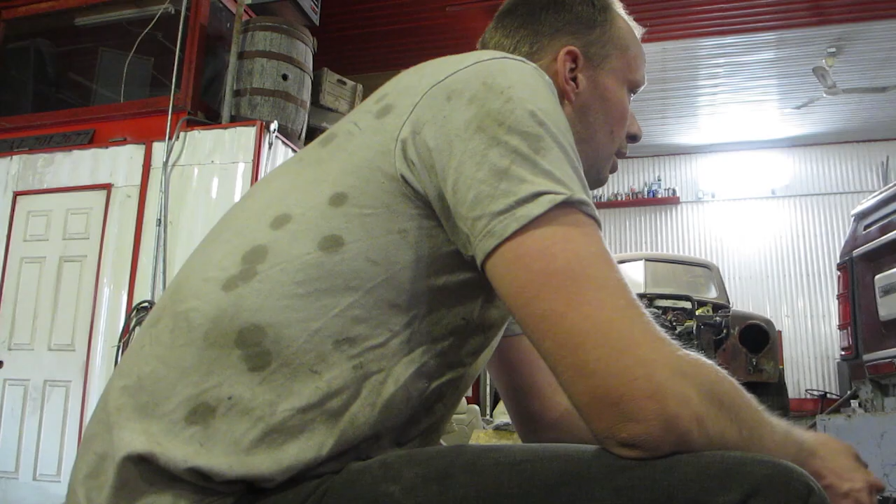Look, when we started this thing, you knew we weren't going to be exclusive. I mean, it's not me, it's clearly you. I'm trying, I'm doing my part. I did everything I possibly can, but you're so needy. I fixed your front half, I fixed your back half, I fixed your top half, I fixed your bottom half. What else do you want me to do? Get out of my shop!

Okay, so we're almost done. Except now we gotta do the wiring for the trailer and the truck itself.

So yellow is going to be left. There's an L in yellow, so left is an easy way to remember that. That goes to your left tail light. Green has an R in it, and it goes towards the right, so we're gonna go this way. That's gonna be right tail for turn and brake.

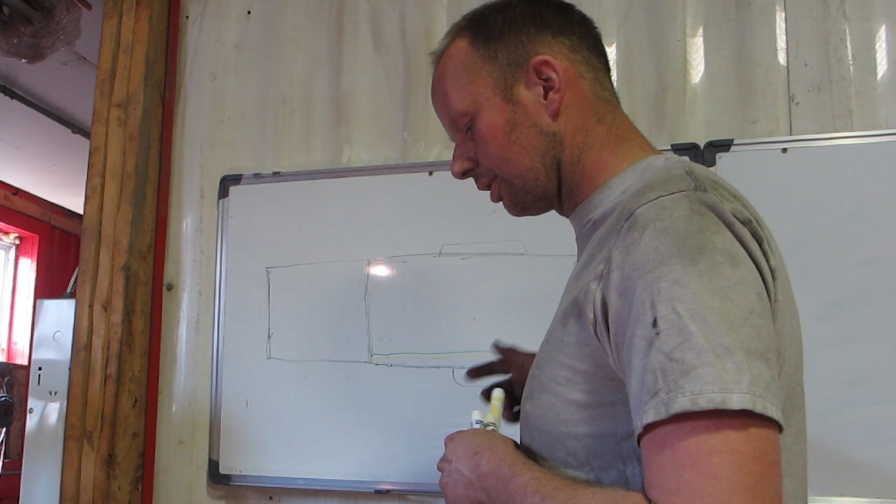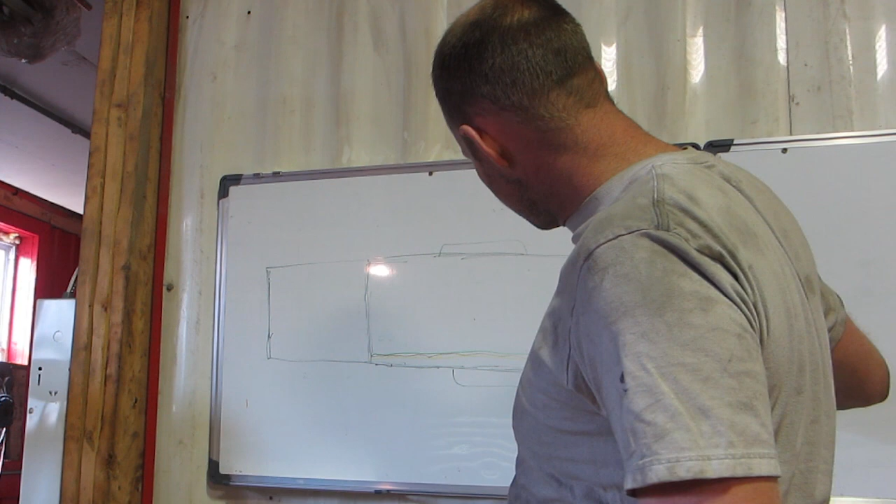Brown is your tail. Brown is down around your ass area, and that's also where other brown stuff is. So brown is your tail, and we tee that off here. Then white is ground — we're in Canada, snow, white, snow on the ground, white, ground. That's how I remember. Blue is brake, so they both have a B in it. So that goes to the trailer hitch.

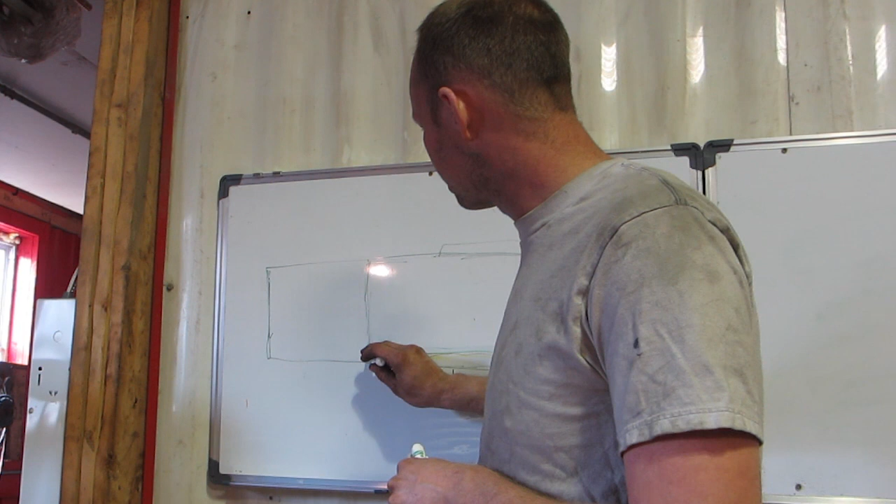So the problem is the truck also has cab lights. So we've got a brown going off to the cab lights. No big deal. We also have brown going to your headlight, and from there over to your other headlight.

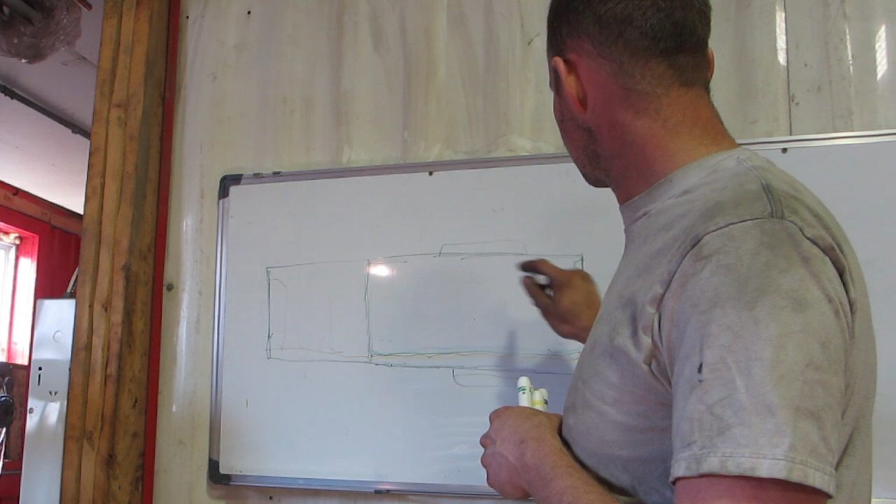Now this truck also has lights on the fenders, so generally rather than cutting the loom in the middle, we try to tee off in the back here somewhere and feed fender lights. Now it also has fender lights on the other side, so we make another tee and feed fender lights here.

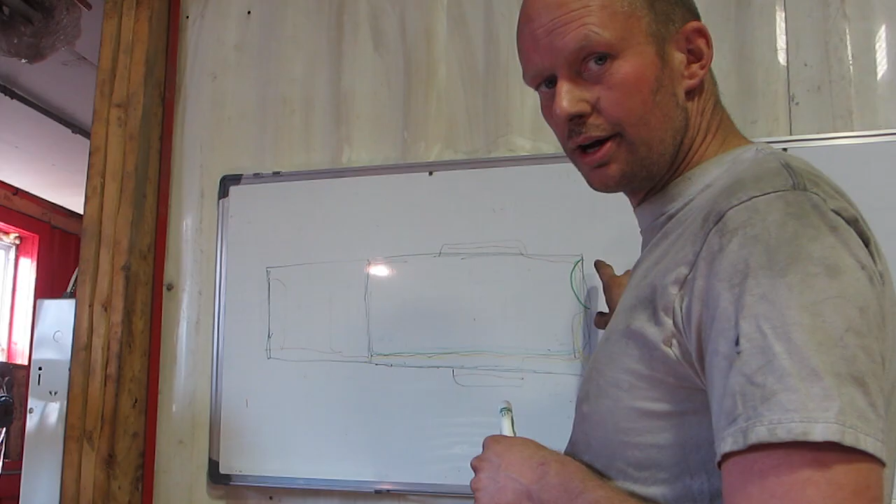Now we also have a trailer plug here. The yellow will have to tee and go here, and the green will have to tee and bring that over to there. We're going to need another brown for a taillight somewhere, so we'll probably tee that off into here too. Now there's also lights on the tailgate, so we probably need another tee right from here, and that's going to feed the taillights here.

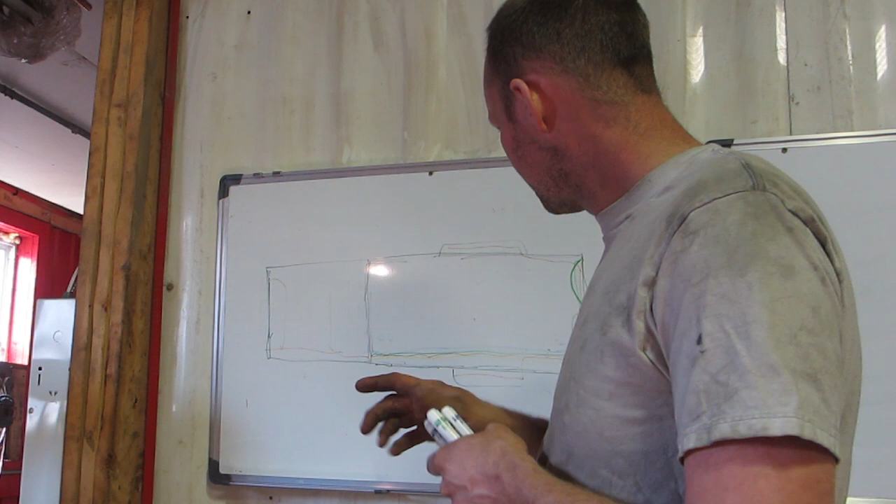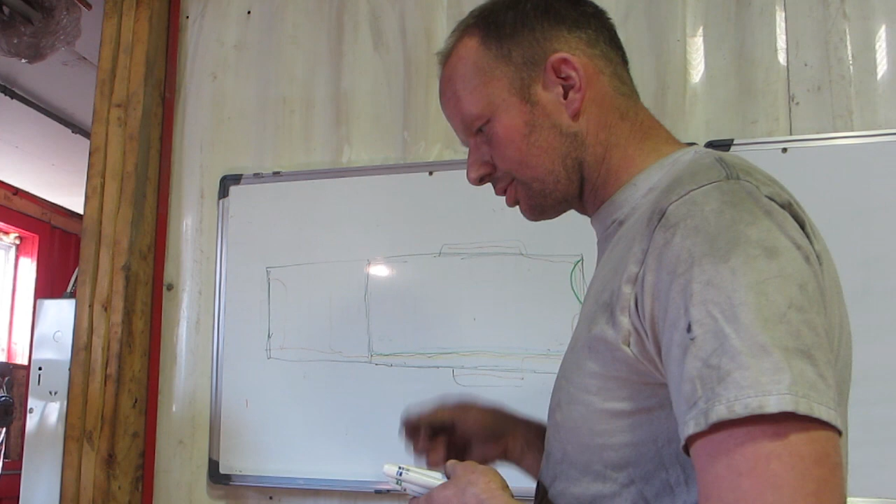Now he also wants to put a fifth wheel in, so we want to have a plug right here. Again, we could cut the loom open here, but that gets messy. Fuel tank is in the way here. We can try here, but there's a bunch of other wires in the way — which one is it? And start stabbing a bunch of lights. What most people do is they tee at the back where they know it is.

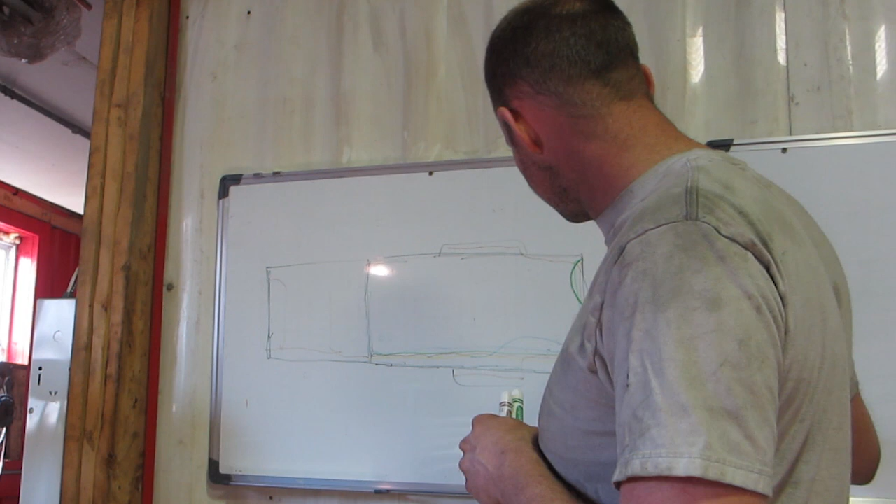So we need a brake line, so we'll bring our brake over. We'll bring our left over, which is yellow, and we'll bring right over, which we can maybe tee off from the trailer plug there. Tail light, so tee off there again.

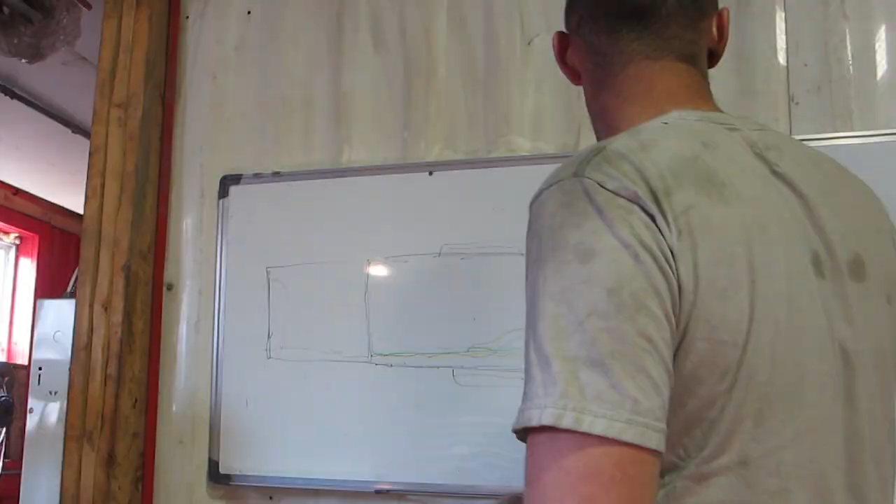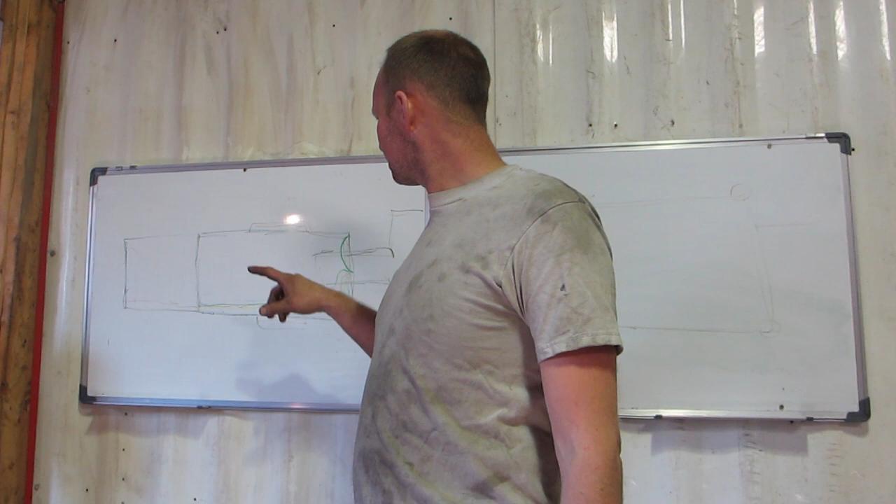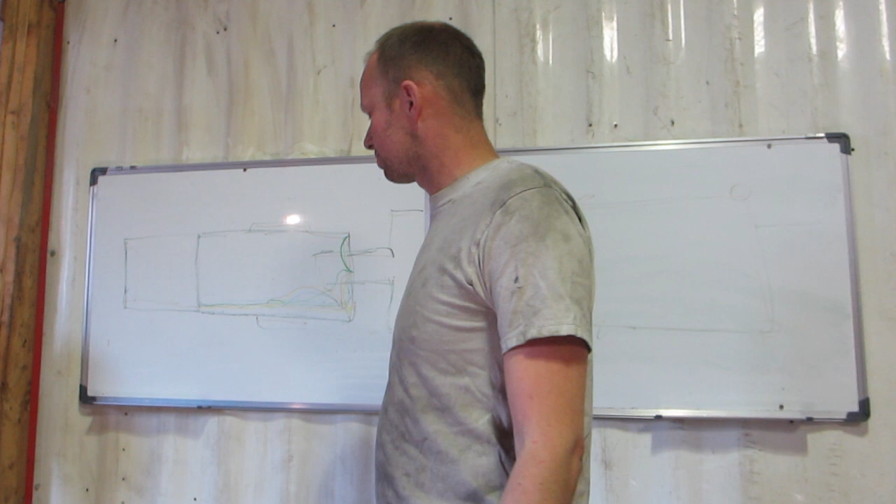And holy crap, what a disaster. Now we got a trailer in the mix, probably another dozen lights, and that's way too much for this one little switch in the cab here to control. All of a sudden we've got 30 lights on there, and the problem is, say you got a cut right here — now you lose your trailer lights, your tailgate lights, your fender lights, everything from the break back, because everything's teed in. On top of that, the switch at the front — Dodge's light switches were always horrible. Probably not going to be able to handle it.

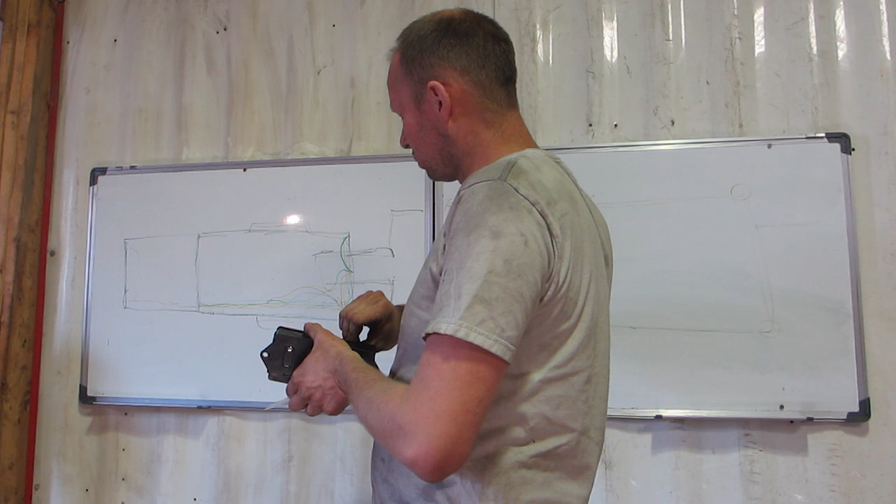So to fix that, you grab one of these junction boxes. It's got a bunch of terminals in it. It's already labeled for your left, right, and your colors and that, so you can't really get it wrong.

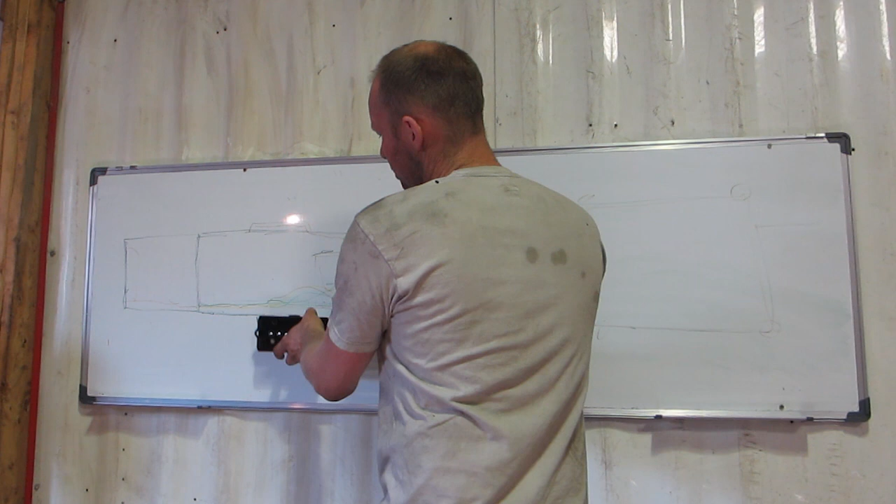And then use these nice little heat shrink ring terminals. Now you can take the box, put it on the frame, and then run your main harness in for your left, right, brake, tail, and ground. And then you've got two more for whatever. Then run your lines to here. From here you can make individual runs going to your fender flares, your tailgate, your trailer plugs.

Use a nice 14-7 wire in nice loom, protected. That way, first thing to do if you have a problem is open this cap up, check if you've got power here. Very simple. The problem is either in front of the box or behind the box. And if an individual circuit's down, we know that that's the only issue.

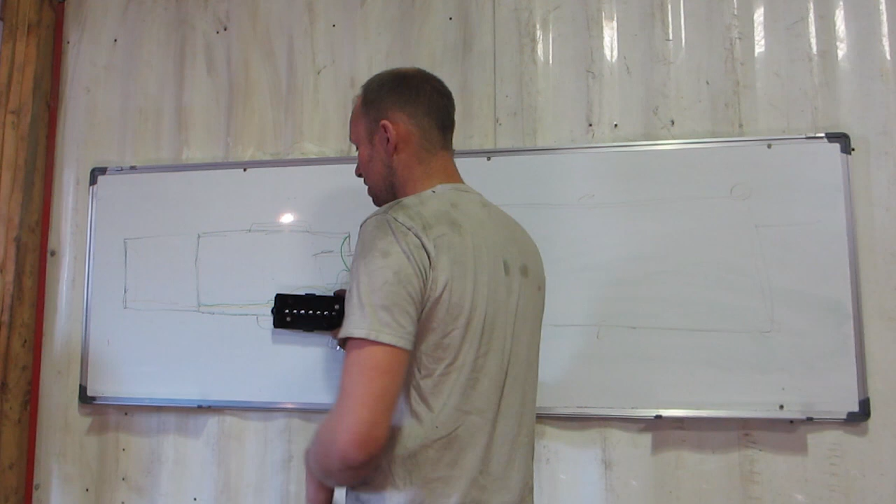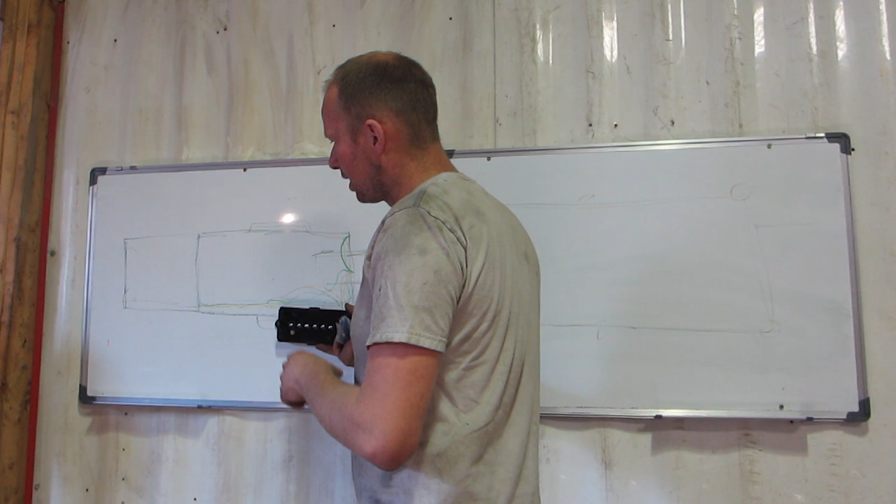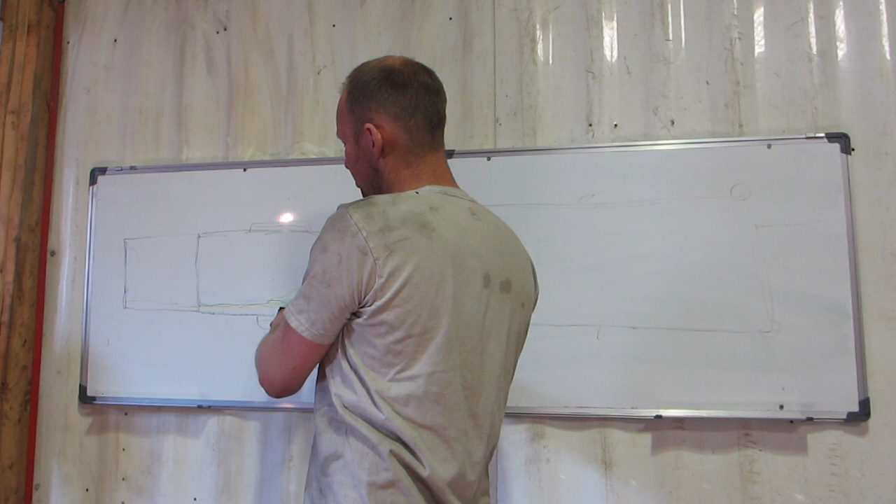Now, I'm going to run the truck itself, just the tail lights and left and right off of the junction box here. And then I'm going to run a relay. I ran a number 12 wire, which is a heavier wire, into the box with a relay. When I turn my lights on, that's going to turn the relay on and connect that number 12 wire to the trailer plugs and to the fender lights and the tailgate lights.

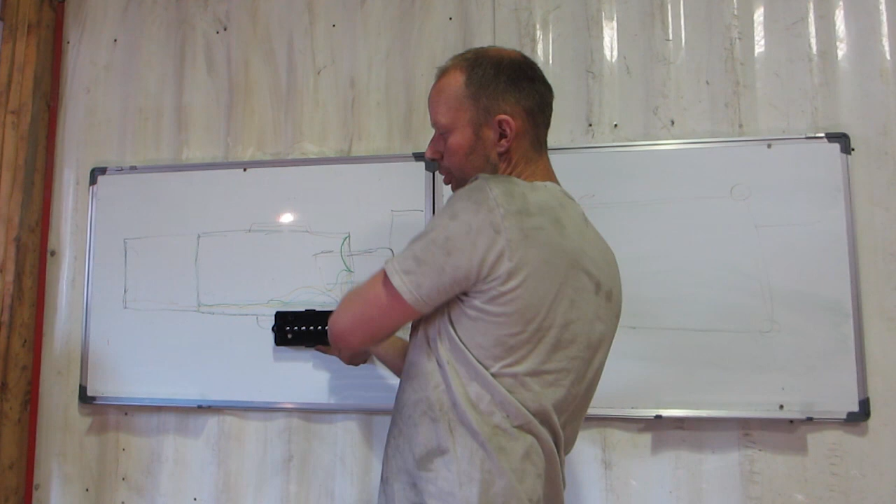That way I have no worries about the trailer being plugged in, burning out my light switch, or if there's a wiring issue later, it's a lot easier to find. So I'm gonna mount this in the frame and start running my wires.

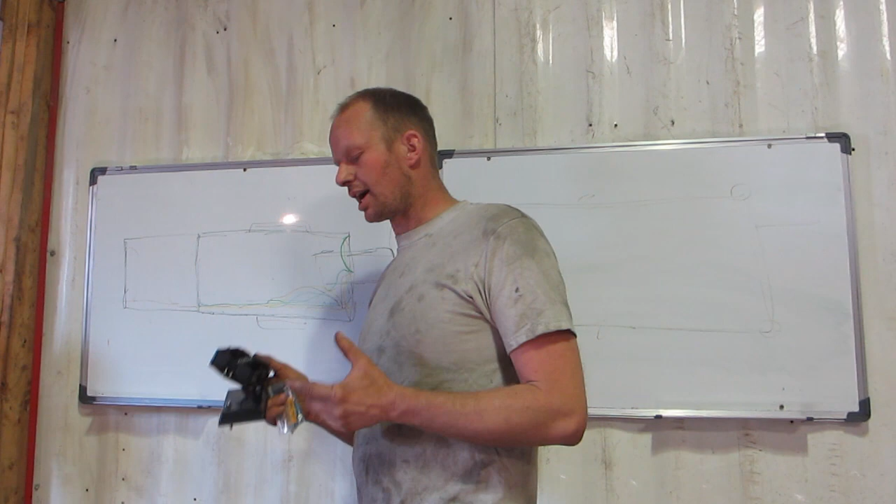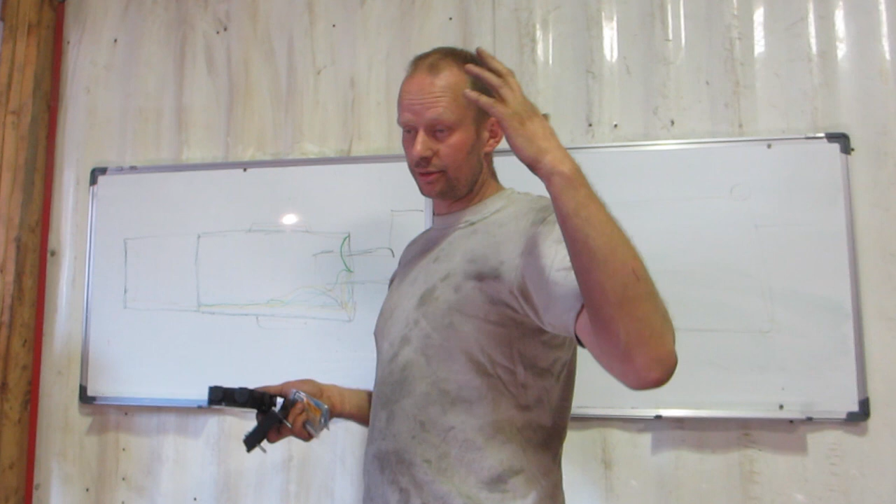Trailers, you wire them exactly the same way. When you buy a brand new trailer, it comes just teed, and a couple years in our salty winter the wires are shot. I generally pull all the wires out and use this nice coated loom, no problems, run it into this box. I've had my dump trailer for 14 years now, never had to redo the wiring on it yet. Well worth it, they're about 20 bucks.

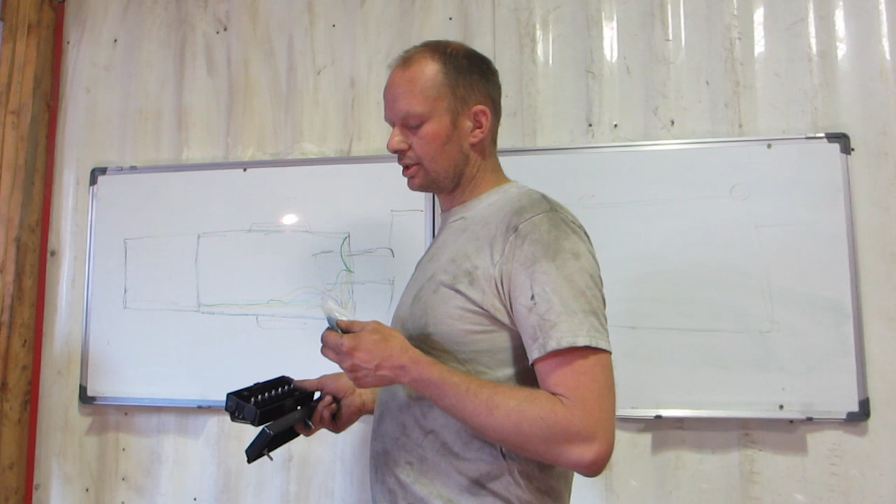And the ring terminals, they're a little more expensive, almost $1 a piece, just because they do shrink around the wire. But it makes for a nice tight seal, and it's a lot quicker than soldering the wire with heat shrink tubing around it. So yeah, here we go.

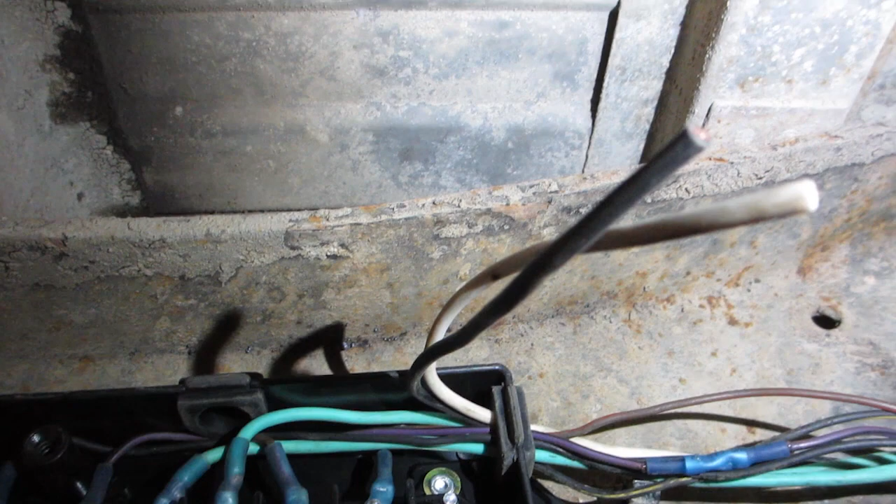So that's the box mounted with just the main wires coming in. I forgot about backup on my little diagram there, so the backup light too. And then I've got my 2 spare ones, both 12 gauge. One's going to be for the lights for the trailers, and the other's just a spare for, might even be power all the time for like the inside lights for campers. Stuff like that. You still want a little bit just in case you're not plugged in.

I'm sure Dodge meant to do something like this from the factory. We got one big line coming in, one going out to the 5th wheel plug, and another small wire going out to the fender lights, and then it splits off. One plug goes to the trailer plug at the back, and then individual wires going to the tail lights. Nice and clean, nice and neat.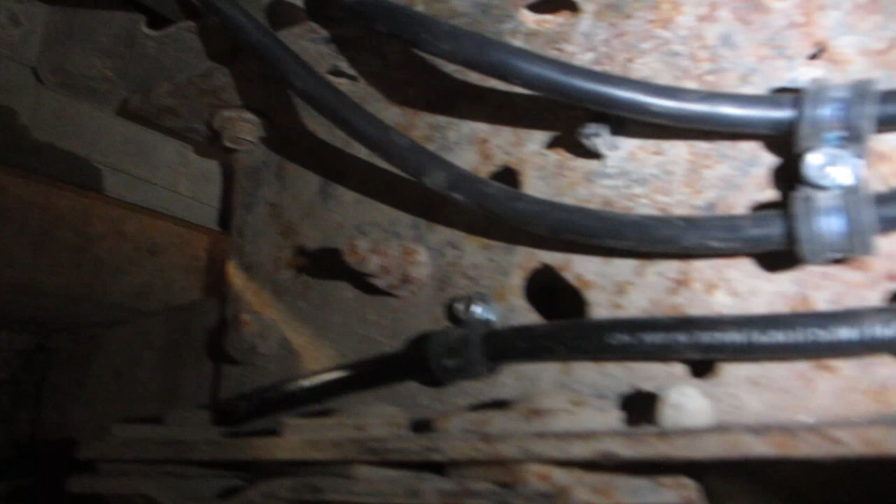You can fill that with grease if you want, that helps to keep the moisture out. And then put the cover on, nice as can be. Here we go.

What can I say about the Dodge? It's kind of a love-hate relationship I've had with this thing. It's been the longest project I've ever done, taken way longer than either the owner or I thought it would take. It's kind of like that first girlfriend you had though, she was hot, and just look at this truck. The stance is incredible, it's a one-off, more or less.

It took a lot of effort, a lot of frustrations to get here, but every time you're walking away from the truck and you look back, it's like, man, that is a nice looking truck. Is it practical? Probably not. Is it high maintenance? Probably. Does it complain a lot? Probably, yeah, but it's still awesome.